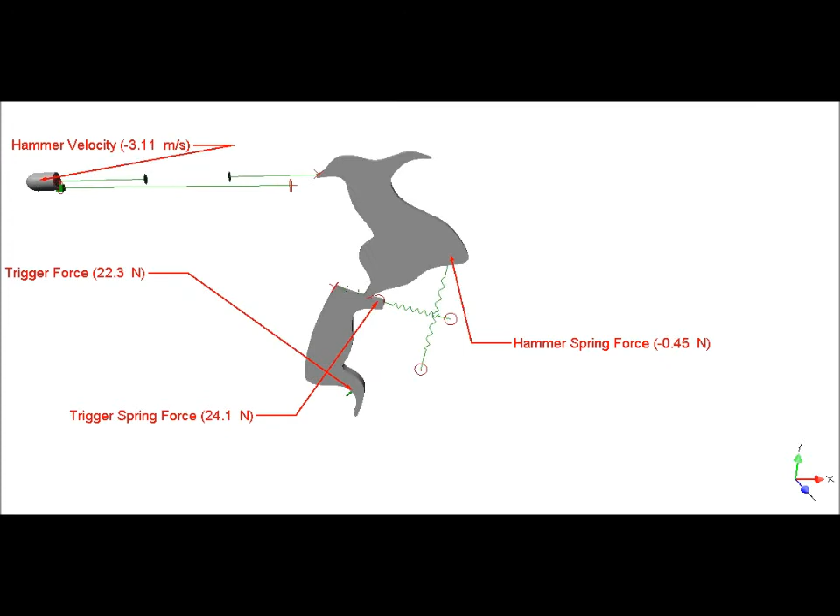This is the actual simulation of the system without the cleanness of the photorealistic effect, as it says in SimWise. And you can see here that when it strikes the bullet, it wouldn't be giving the bullet a velocity. That's just for me to determine how fast and with what force the hammer is striking an object in front of it.

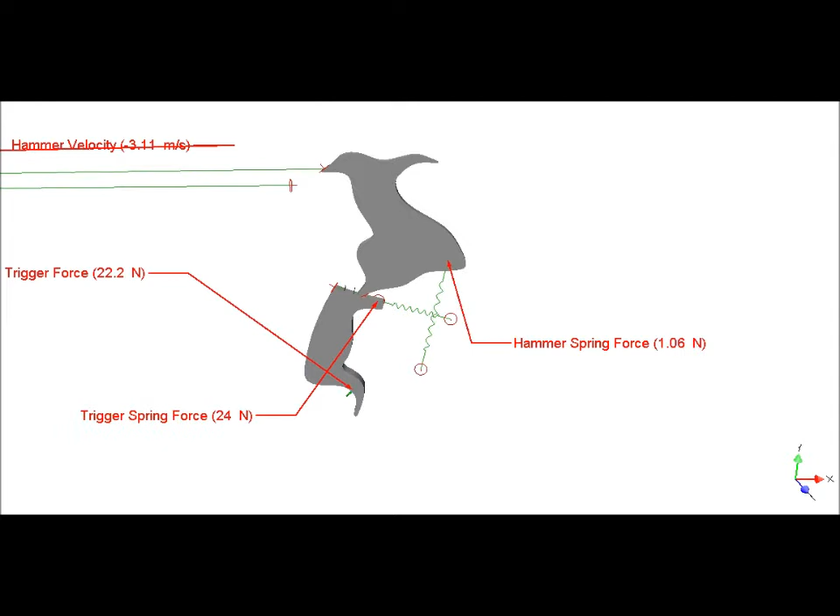From impulse, I can gather that it's about 1.5 newtons of force, which seems a little bit low, but considering the system is inaccurate in its setup in general, it seems fairly decent for a force. The velocity seems reasonable.

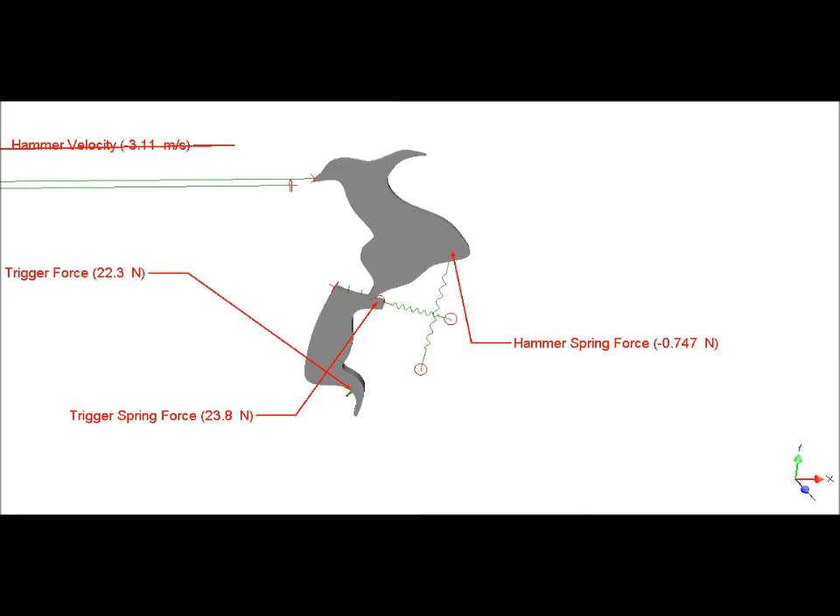So the first two simulations, you could tell that they were very slow. They were running at 1,000 frames a second, and so that's about 25 seconds per second in reality. This last simulation is run at about 2 seconds a second, and so it looks a lot more like what you would think a trigger would look like on a gun.

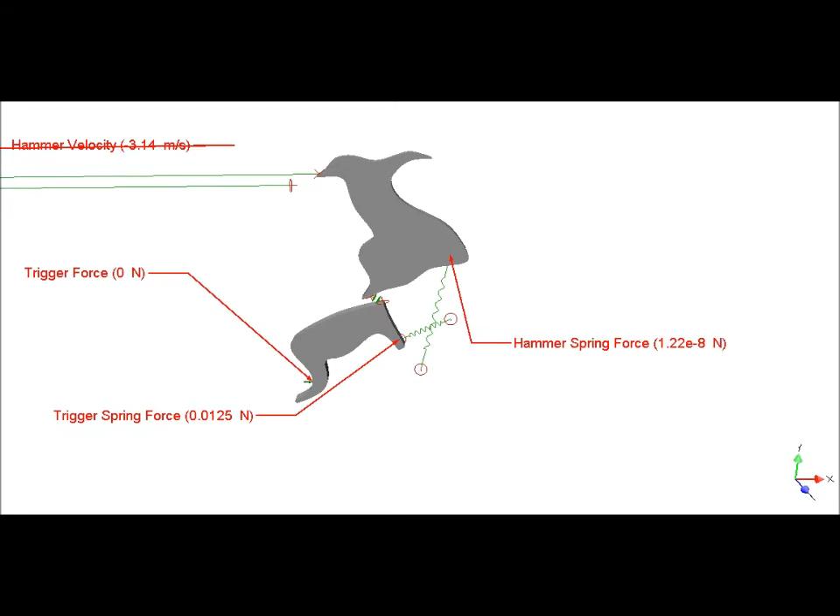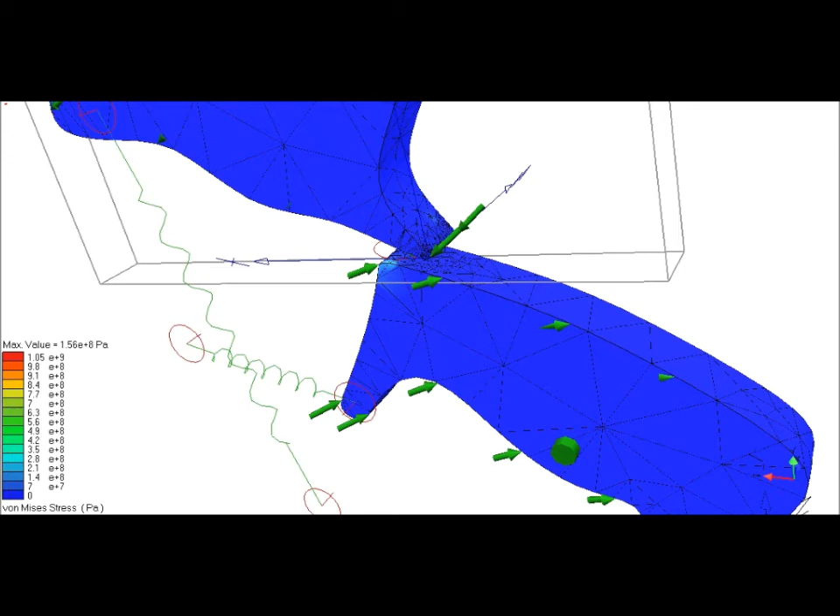So this is right as the trigger is going up, and this is also right before it releases, and you can see there's some stress around the rotation of the hammer, and that's about as critical as it gets. Once the spring brings it back to regular position, the stress starts to dissipate.

Now there also should be stresses around these localized springs wherever it connects to the block, but they didn't come out in the results. I think just because that kind of constraint doesn't produce an actual effect on the block. I was having some sort of error with that.

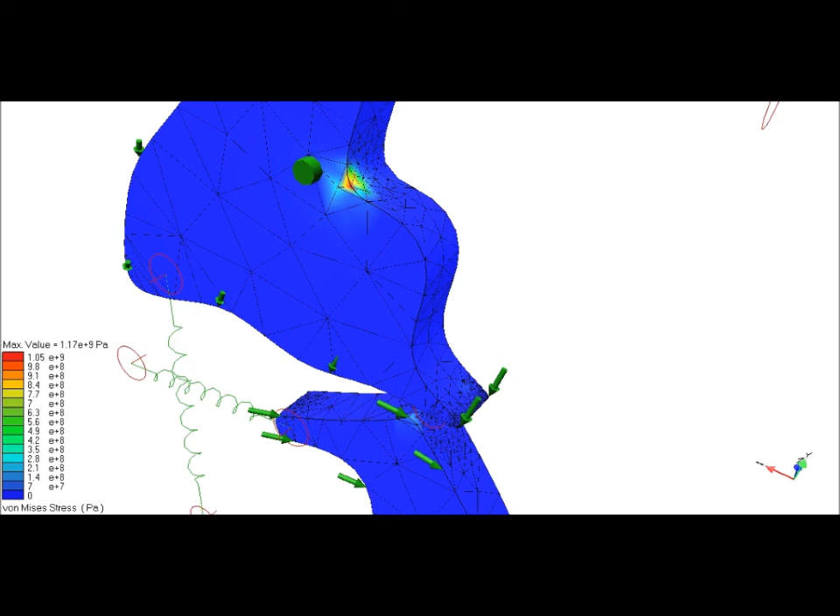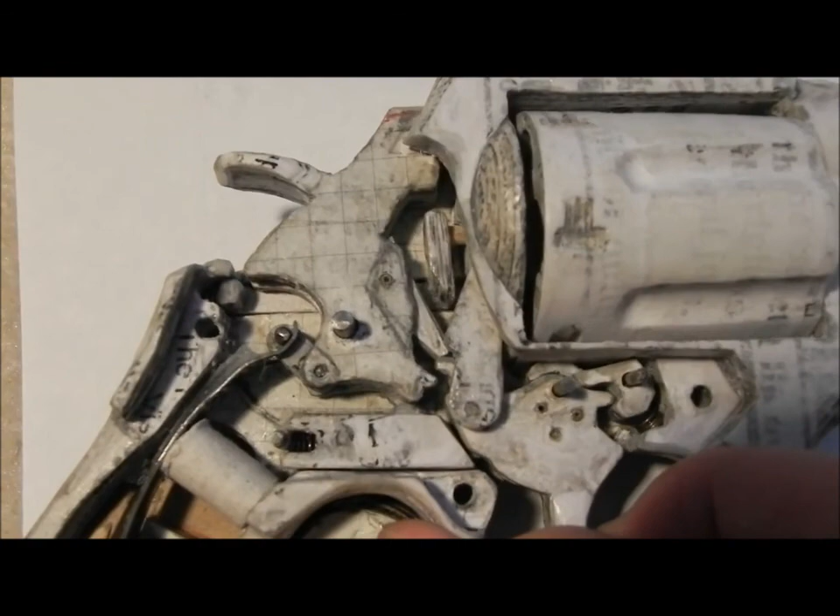And this is the video to show you how it would be used in reality. Pull the trigger and it basically pushes that up, which raises the hammer, and when the back of the trigger clears, oops, let me do that again. When it clears, the hammer drops.